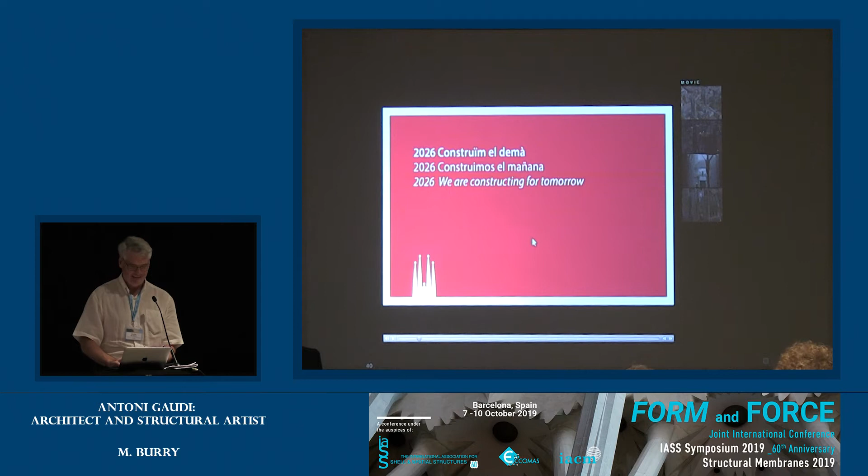This is the official video of what we're up to. It's about 4 years old now, so it's already historical. But 2026, the anniversary of Gaudi's death, is when the building is due to complete.

These are the sacristies coming up, and one here is now completed. The Tower of Mary, the second highest tower on the building, is going to be finished later this year or early next year, I believe.

This space is the Sala Creuer - I'm going to talk about that in detail, this one here, which not a lot of people know about. The Evangelist Towers are well under construction. The Passion Facade was finished last year, I think.

The baptistries are somewhere out there, as is the Glory Facade. My final role in the project was to look at all the evidence from Gaudi about what is intended for that facade, the Evangelist Towers, and then the main tower to Jesus Christ, 172.5 metres tall, which will make this the highest religious building in the world.

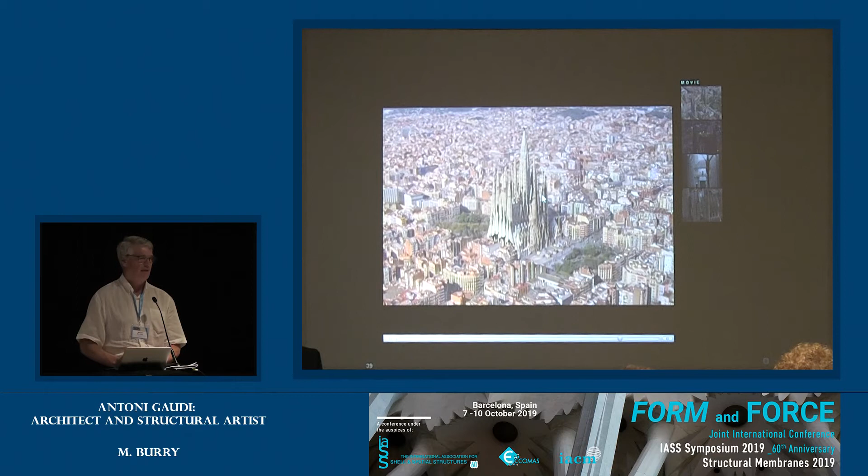So that's the challenge. When I showed this 4 years ago, which is when I think it came out, people would say 2026, come on, you're dreaming. But I think you'll see when you go there just how much has happened. The main part of the building is now at the same height, more or less, as the existing part - something many of us didn't think we'd see in our lifetime.

The position of the building, of course, it was founded by a committee of concerned citizens who felt that the growing Barcelona outside the Gothic quarter was being socially challenged through the sudden creation of wealth and the working classes that come with it, and felt that a church dedicated to the Holy Family, the Sagrada Familia, would be in order. It was originally being built in fields, but as you can see now, it's very well integrated inside the fabric of the city.

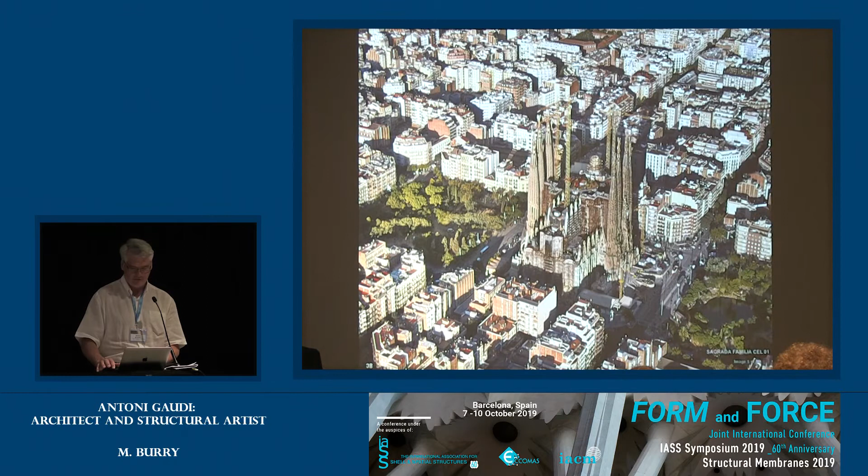In Gaudi's time, he managed to finish just one tower. The four towers were completed, but he only saw the one tower when he was tragically struck by a tram. He had also built most of the apse, but that's only less than 10% of the building. And of course, a very interesting problem.

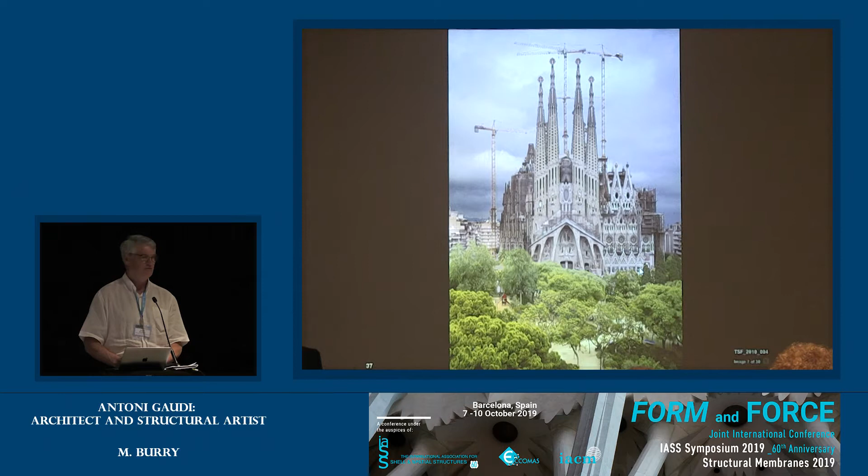When I first found the building, I came because I, as a student at the University of Cambridge in the UK, had been advised that Gaudi had no school. We looked at him in one or two slides. He was described as possibly a genius, probably mad, but there was no school, meaning that he had nothing to offer us. So as students in the late modern movement education that we were receiving in the 1970s, nothing to see, move along. But of course, coming from the Antipodes, that's a red light, which means a green light.

So I was in Barcelona as quickly as possible, and was a bit fazed because I came out of the metro and found myself looking at this facade, which is not what I was expecting. I understood that there were four towers and a part of an apse, and it was a sort of testament of a failed genius. And there I was looking at a crane and a building that was manifestly under construction.

And this led to an interview with the two directors, both of whom were 90 years old at the time, who were looking to start the major thinking for the body of the building, the nave. And the questions I had for them were, where was their authority coming from? Because I'd heard about the drawings being burnt. And the second question was, even if you had authority, how on earth do you communicate to the builders what the process is? And they said, well, that's a good time to be asking these questions because we're looking for someone to help us on this.

It was a kind of one of those very unexpected offers. I have to be honest and say that I didn't take it up. I was going back to be a great modernist architect myself and went back to finish my studies. But naturally, you can imagine, I reflected on that decision and wrote back, and was fortunately given a chance to go. I went there, and that started the journey of unravelling the secrets of Gaudi's method that has allowed us to continue on.

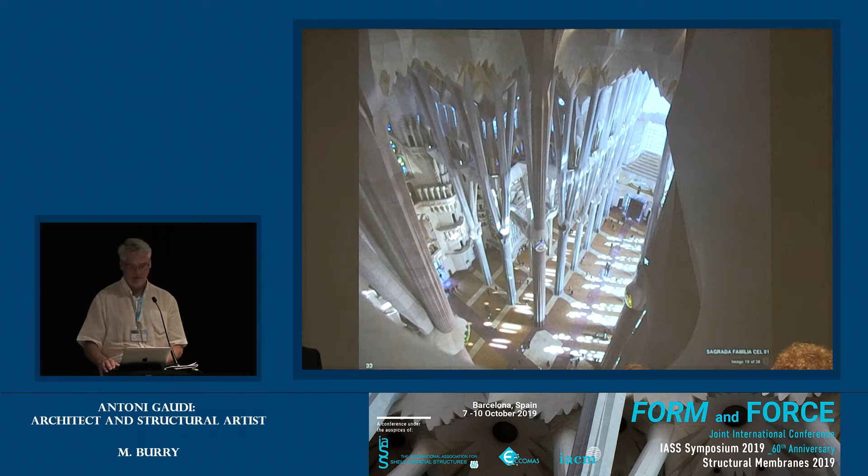You're also going to be surprised because these photographs here show it as being a very white light. It was originally glazed temporarily in clear glass, and then slowly the stained glass has been added to it.

So this is not what you'll see if you haven't been there before. Also, you'll see it with considerably bigger crowds. These aren't trick photographs—it was literally not as visited then, especially on the opening.

This is the inauguration with the Pope on November the 7th, 2010. So that effectively was the completion of the building in many ways. That's when you could go through the door and see the interior. And the rest is the main facade and the towers, which don't really affect the experience of the interior.

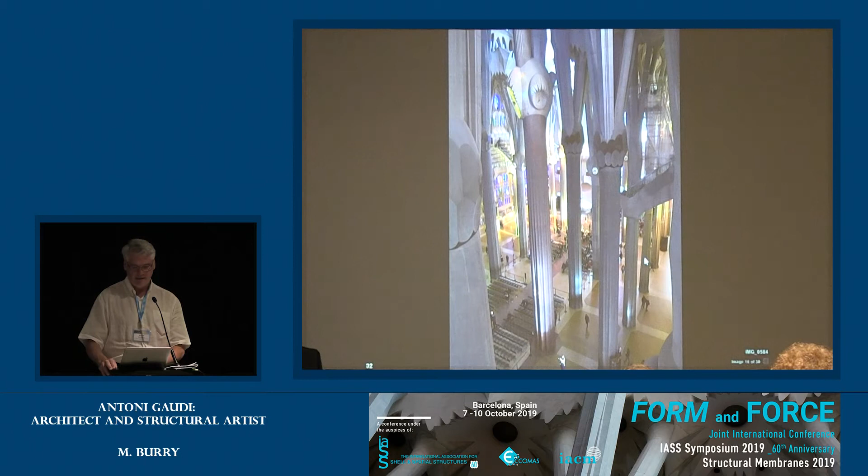There we have the former Pope, Benedict XVI, doing his thing. And now you can start seeing what the coloured light does for the building—it's very, very different. Gaudi never wrote a word on his theory, but he spoke a lot.

Hence, the young architects who were then my senior colleagues had made notes, and the notes are very consistent. They're collected in a book called Gaudi's Thoughts. He talked specifically about having coloured light around the bottom of the building and clear light around the top. So you get this extraordinary effect of heavenly clear light at the top of the building and this awesome light below.

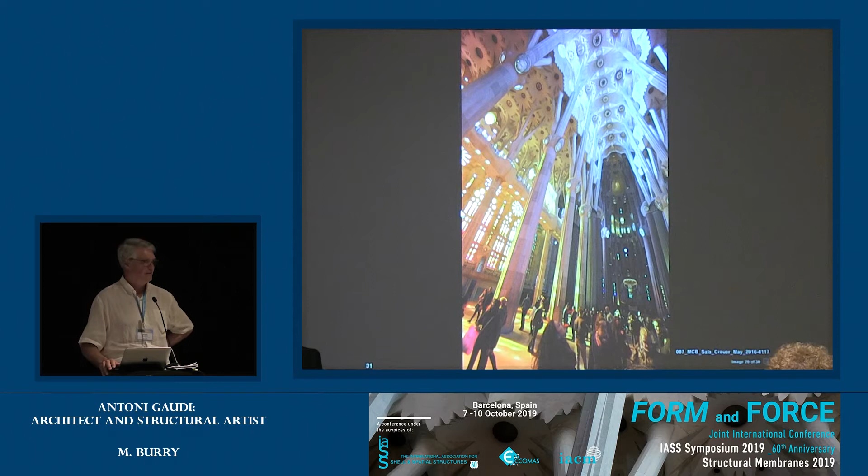And the other thing that's very clever about this stained glass is that the building is different at different times of the day, different weather and different seasons. So you cannot go to the Sagrada Familia and tick it off your list—you'll just have to come back another time in another season.

And there you can see this effect of the white light above and the coloured glass—blues and greens on the east side, cool and natural, and then the fiery reds on the setting sun side.

Now, there's some funny things about the building. If there's one thing that's unique about me, it's the fact that I think I'm the only person who's worked on the building both digitally and pre-digitally. I did all the hard yards by hand, by calculator, and by slide rule, would you believe?

And the building represents all sorts of milestones. When I lectured about it in the 1990s and showed everybody what we were doing with very advanced software, I would get, 'That's all very interesting, but what's this got to do with me?' And I was saying, well, that's what I'm trying to show you.

I was explaining what I thought would be the world of architecture in 5 years' time. In fact, it's taken between 15 and 20 years for the rest of the world to catch up with the techniques that we've been using on this project.

Starting with robot stone cutting, that's 1989. Parametric design, where we're using aeronautical software, in 1992. Then 3D printing—I think this will be the first project to have had models made of it using 3D printing, because the machine that first brought them out was very pleased to have this building as a chance to strut its stuff.

LiDAR scanning—we did get a LiDAR scanner, we got one of the first ones that came out, but that was in 2007, I think. So it's taken a long time before we could actually scan the building in order to embrace the computer power and the 3D printing to have a model.

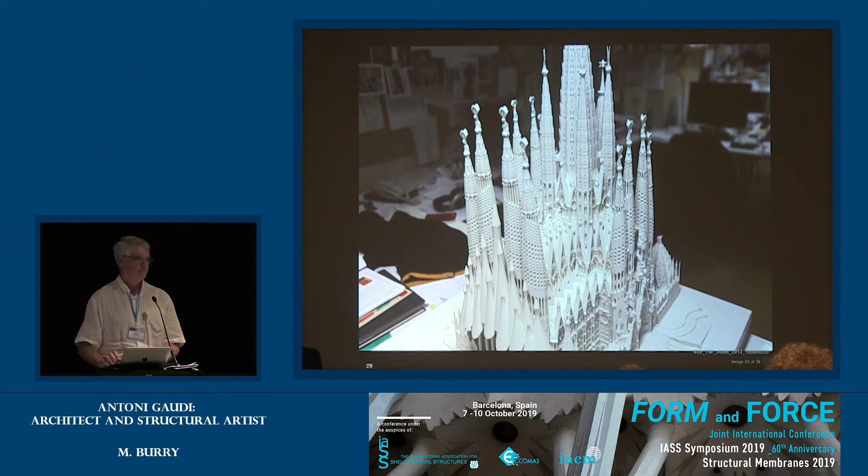Because of the engineering focus, I thought I'd better put some structures in, even though I have no pretensions in this area. I'd titled this talk Gaudi, Structural Artist, referencing David Billington, and engineers like Candela, Isler, Maillart, Nervi, and Dieste. These are great engineers with architectural sensibility who met the target of efficiency, economy, and elegance in a scientific, social, and symbolic context. I want to show Gaudi as an architect with engineering sensibility - really as an engineer, since as far as I know he did all his own calculations.

This is the Gothic Revival project that he first put to the client. It took him about 20 years before the client ever saw a drawing of what the building might look like, so there was a lot of trust involved. Eventually, this series of models was produced by David Putsch, one of the lead architects at Sagrada Familia today, whose PhD looked at the evolution of Gaudi's work.

This is the first neo-Gothic solution - not a lot of surprises there. This is actually the second, but not the final version. You can see he's assimilated something in terms of his structure. It's called the parabolic version because it's literally taking the parabola, an approximation of the catenary, as the structural system.

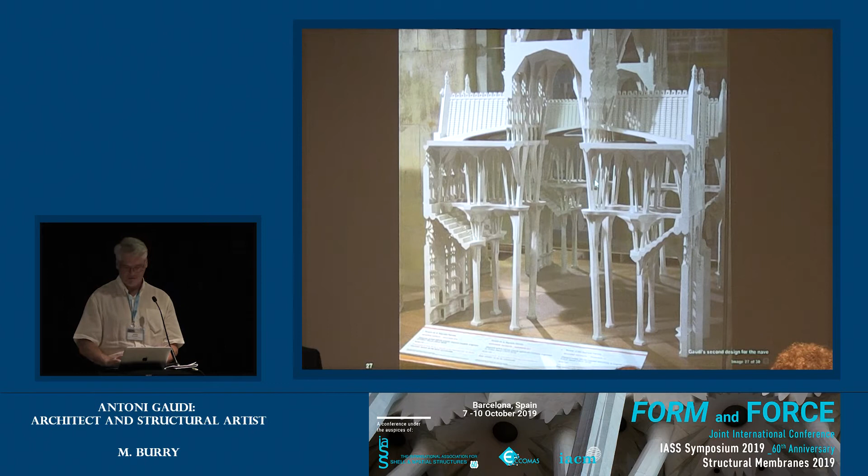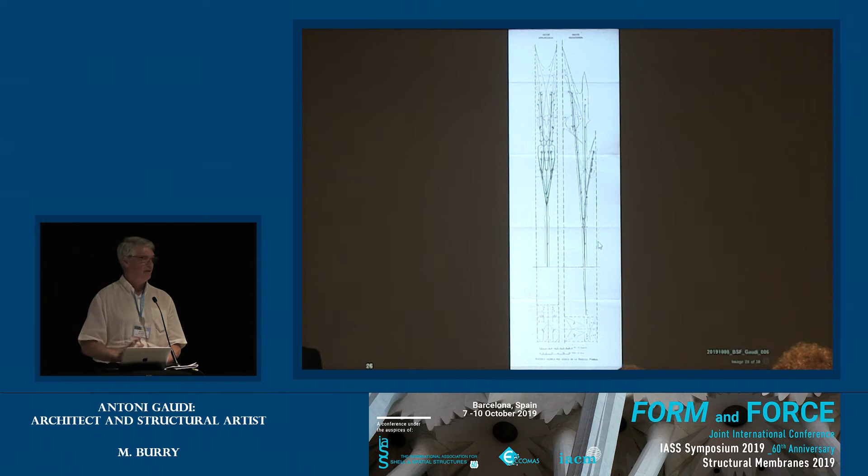This is a book published by Puig Boada, one of the two architects who first employed me, in 1929, on the Sagrada Familia, including the static resolution for the building. As far as I'm aware, when finite element analysis was employed decades later, it led to no change whatsoever in what Gaudi had designed. You can see it's all fair dinkum, as we say in Australia.

It doesn't mean a lot to me, but it meant a lot to Gaudi, and everybody's built on the basis of this. So, the first myth: the building was not designed with a hanging model in any way. He drew from what he'd been doing at the Colonia Guell Church, which I'll talk about briefly, and made a static version of the calculation.

I'm going to talk a little about things that didn't go completely according to plan - a bit of a silly euphemism, because I don't think Gaudi worked to plan at all. He's a volumetric kind of person. This is the drawing he had for the Casa Mila, La Pedrera apartments, and this is what was actually built - you'll see there's a big difference.

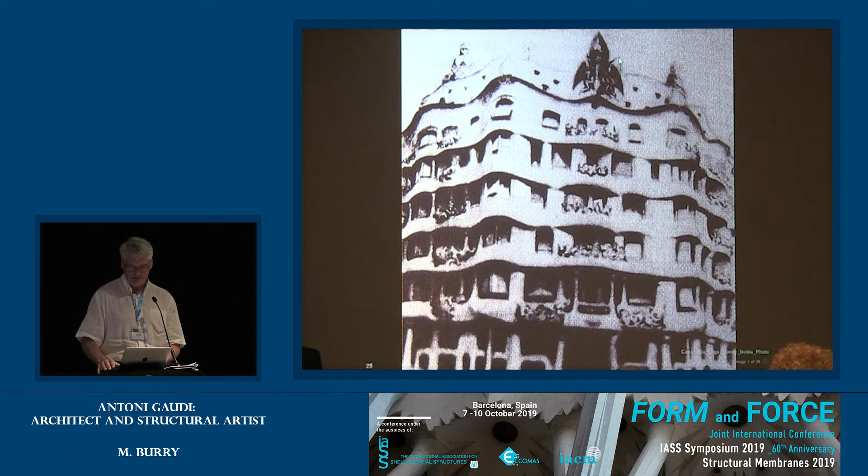This great sculpture of the angels by Carlos Mani was never built, because the client, due to social unrest and a religious reaction against the church, decided he wanted none of Gaudi's faith worn out on the building. So the building was quite disappointing from everybody's point of view - Gaudi, because it was stripped of all its religious voice.

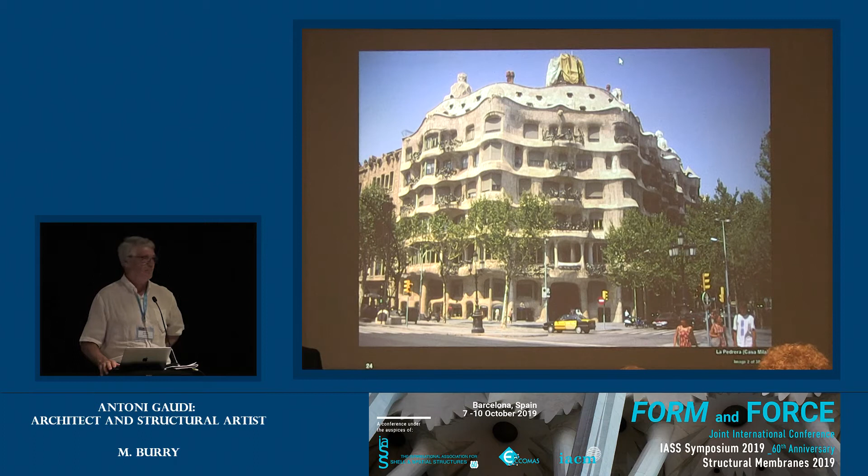The client, because it cost many times over budget and took many times longer to build than expected. He was using his wife's money to speculate on a prime piece of real estate, wanting apartments that would shift and make a good profit. The famous exchange is a great example for teaching client relationships at a school of architecture - what not to do. When the client's wife, whose money was being invested, asked after seeing the plans for the first time where she was going to put a grand piano, he suggested she took up the violin.

Why? Because this was actually what was proposed - here's one of the floor plans, and these are the upper plans, all flats. But if you look at what was actually built, you can see Gaudi himself had to enter what Greg Lynn called contractor space - that's when all the dreams of the architect and engineer are reduced to straight lines, because that's what contractors understand best.

This is where you can see that if you were putting a grand piano in here - and this joke, of course, is for architects; anybody younger than a generation behind me will have no idea what I'm talking about - but people trained in my generation worked with stencils. The stencils would have a dining table and chairs and a kitchen bench, and for some reason nobody ever knew, a grand piano was always on the stencil.

Anyway, we can play the grand piano here. So these are Gaudi's drawings. We don't really fully appreciate that it's actually a steel building - shipbuilders were the engineers and makers of the frame.

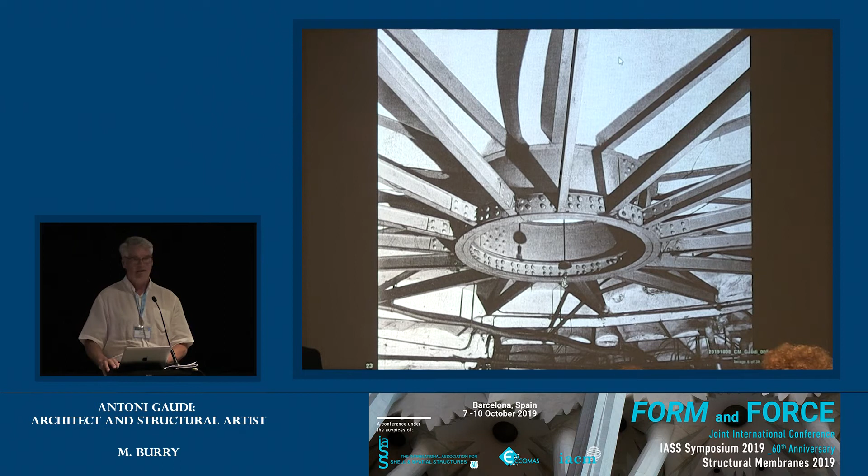So a very early example of a steel building. What we're looking at is a stone veneer. And because it's so perfect, we don't actually look at it critically enough and imagine how on earth did these blocks of such weight get built, 5-6 stories above the street level and fit so perfectly. And what about the kind of radical idea of a crease that becomes smoothed out?

It's a long time now, but every time I had a chance to get students to model this by hand, they could do it with sandpaper on a piece of square section timber and they could just roll it. Then I'd ask them to model it on a computer, and it's probably a bit easier now, but certainly it was impossible to get that fluency that you can in the real world.

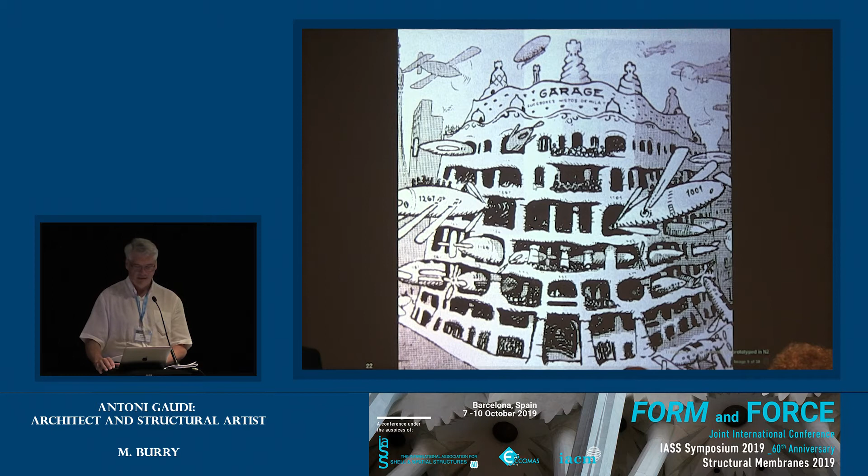And the building, when it was finished, had fallen out of fashion. So not only did it cost so much, take so long to build, but it was now a joke. Here it's being wit - being proposed as an airship station. And worse than that was Gaudi himself fell out with the client.

He fell out with the client, and you can see them having a battle, because, in fact, it led to a court case where Gaudi was actually claiming his fee.

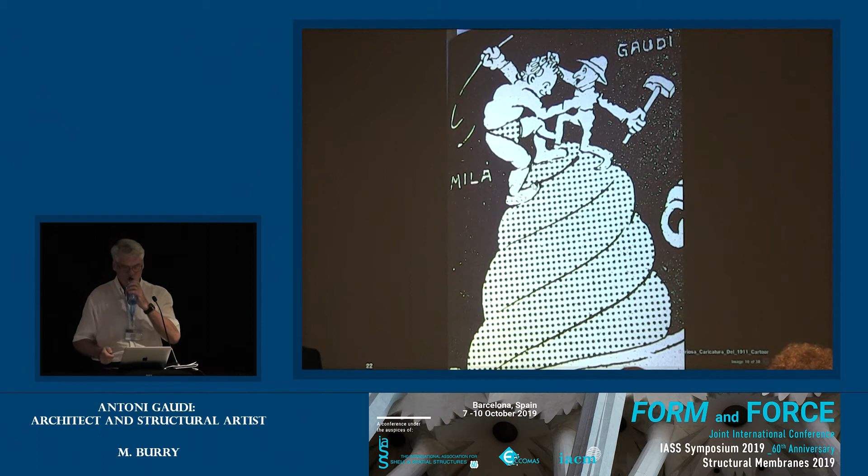A little bit of theory for today.

Towards a Plastic Architecture. The new architecture is open. The whole structure consists of a space that is divided in accordance with the various functional demands. This division is carried out by means of dividing surfaces in the interior or protective surfaces externally. The former, which separate the various functional spaces, may be movable - that is to say, the dividing surfaces, formerly the interior walls, may be replaced by movable intermediate surfaces or panels. The same method may be employed for doors.

In architecture's next phase of development, the ground plan must disappear completely. The two-dimensional spatial composition fixed in a ground plan will be replaced by an exact constructional calculation, a calculation by means of which the supporting capacity is restricted to the simplest but strongest supporting points. We've seen a lot of that over the last few days.

For this purpose, Euclidean mathematics will be of no further use. But with the aid of calculation that is non-Euclidean and takes into account the 4 dimensions, everything will be very easy. Well, the whole point of this conference is to drill home that it's not very easy and that we're all incredibly clever by finding our workarounds.

But isn't it incredible? This was written in 1924, 2 years before Gaudi died, by Theo van Doesburg, Towards a Plastic Architecture. He's making a manifesto case for why we need to take ourselves out of the rectilinear and out of the Euclidean, and Gaudi was doing just that.

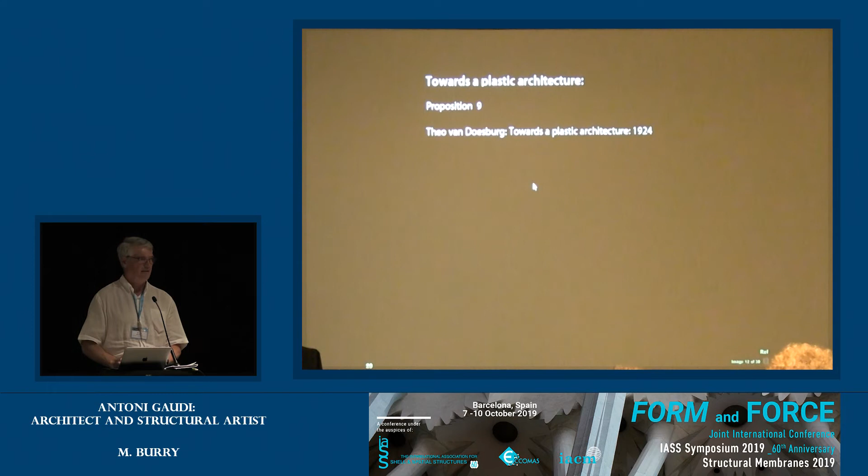We can see that very clearly in this building, which I know you know very well, but I'm going to share my thoughts about it, which is the Colonia Güell Chapel Crypt by Antoni Gaudi.

You can see that it was a long project, 1898 to 1914, starting with the famous hanging model, which I won't dwell on too much, but did you know that it had tensometers, that it was highly scientific? So back to Billington's scientific, social and symbolic - this is scientific.

Not only did he make the world's first - I'm sort of doing a bit Trumpian there, should we say, one of the world's first - architectural computers, but I'd love to know if there was any earlier.

Force finding form, the theme of this conference - obviously this building is the primary exemplar of this. But Gaudi, it took 8 years to do this, and he was building it off-site, outside Barcelona, in a shed at a scale of 1 to 10, modelling all the weights very accurately at a scale of 1 to 10,000.

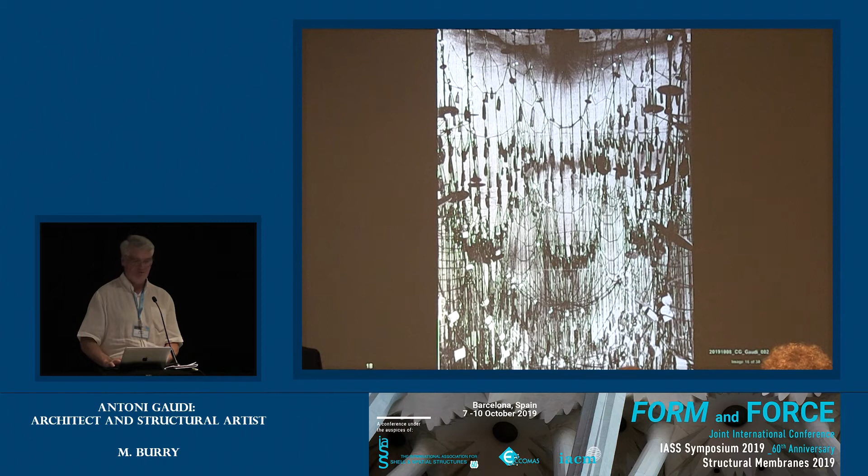Gravity was finding the force of the building, and the tensometers he placed in various strategic places were measuring the forces, which he would then mark on these little discs. The model was painstakingly rebuilt by Jos Tomlow and colleagues, ultimately in Frei Otto's Institute of Lightweight Structures.

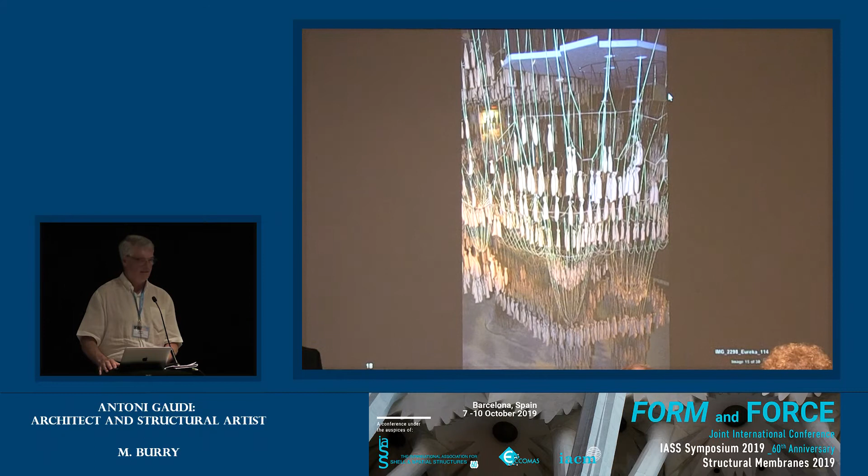By having Jos and his team rebuild it, we know exactly what was involved. It took 8 years to build the model, and then imagine this as an undrawable project—this is what Gaudí did. He actually had to take a photograph of the building, turn it upside down, paint over it, and that's what the client was presented with after 8 years. When he asked what it looked like inside, no problem—it's another photograph and painted.

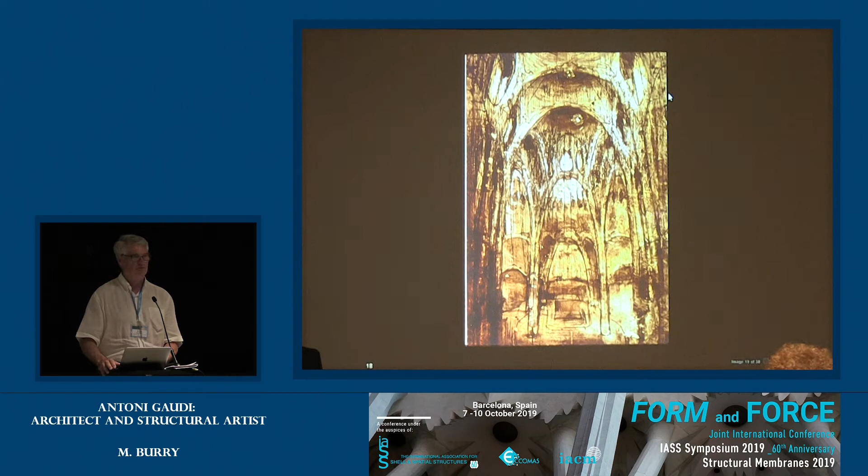These are all pre-digital techniques when you think about it. It's Photoshop, it's Maya, and then you come to the parametric modeling. The model itself was parametric, obviously, and it was used as the drawing for the project. All the measurements were taken, scaled up, and put on site, and then you get this extraordinary interior. Those of you who've been here long enough to go out here and haven't, it's an extraordinary project.

I think it's Gaudí's best project, but not his most important. It's his best project because, working as an artist and a sculptor, he took it as far as he could—but he didn't take it far enough, as you'll see from the outside. It was only constructed to the basement. The whole church above was never constructed, and no doubt never will be.

He had a great client who allowed him 8 years to do this. There's no steel, no tricks, no concrete—it's all Catalan vaulting, which you've heard about from several sources, and just very skillful brickwork.

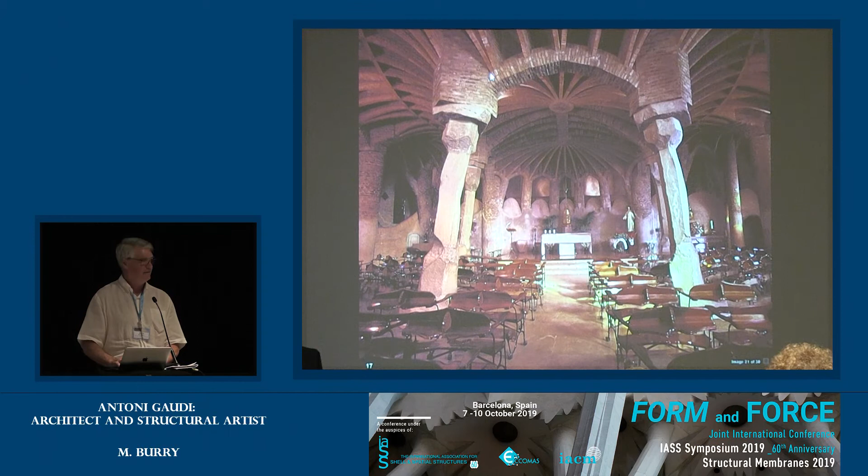Someone with a lot of confidence—he decided that these basalt columns, which were naturally formed hexagonal prisms from the ground, were a bit overstructured. So he asked the stonemasons to chip away each one. You can see there's a layer of lead here; he's even thought about that. There's 2 centimeters of lead so the building can adjust as it gets higher.

In order to gain the confidence of the stonemasons to make this scarf cut, he had to stand underneath it while he was doing it. So I think that's someone who knew his stuff.

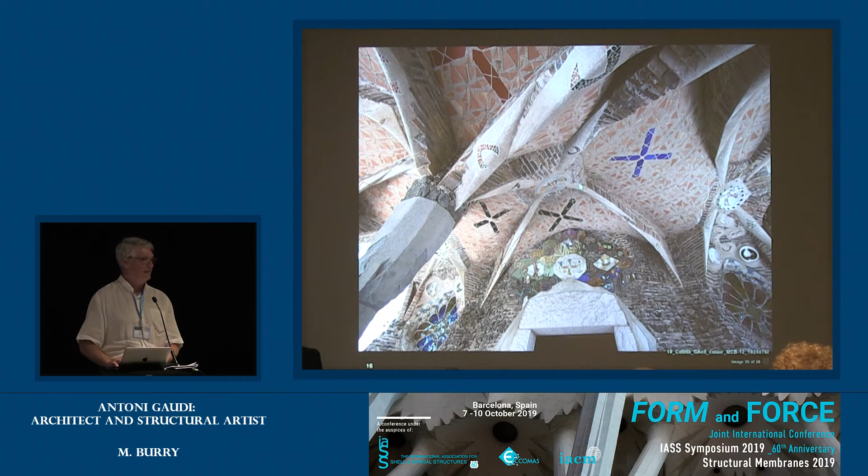In this project, he introduced the hyperbolic paraboloid for the first time, a ruled surface, and you can see that appearing. It seems decorative here, and here it's a decoratively applied surface, but it has great meaning for the rest of us who followed in his footsteps.

In terms of sustainability, you can't get more sustainable than this. This is brick, not of the first quality, actually placed along the lines of force. Anywhere there's infill, he's using the brick—broken brick that comes from a misfiring. When they make bricks, there's always some that aren't up to scratch. Well, that's what he did with them.

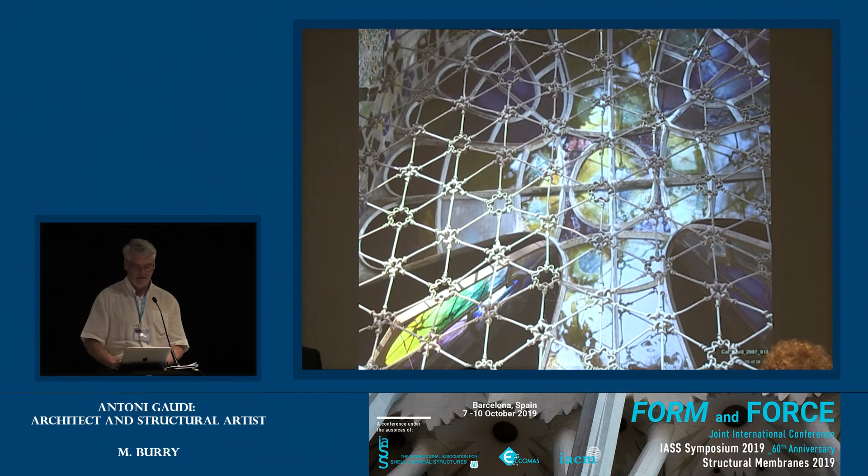Then there are these windows, which are to die for, because they're like butterfly wings that open. The grills are made from the discarded needles from the factory that this little chapel was built to support—it was a corduroy factory. So Gaudí, at the beginning of the 20th century, was looking at sustainability in no uncertain terms.

These are testaments of failed genius. They've now been cleaned up by UNESCO and whisked away, but it was such a romantic building to visit until it was restored—though in my opinion, it was better the way it was. You had these columns just waiting sadly outside for the interior they'd never be asked to involve themselves with.

So let's have a look at other aspects of Gaudí.

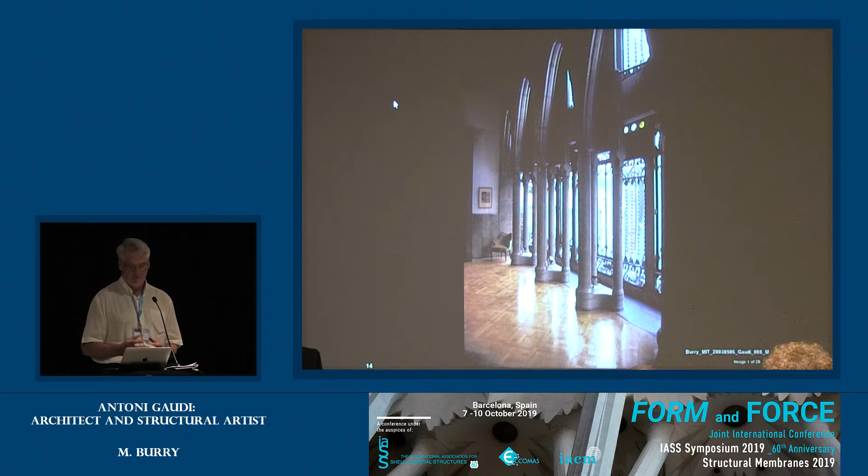I'm going to talk about columns shortly, in his generation of columns, but even in one of his early works, finished in 1889—the Palau Güell, at the bottom of the Ramblas—built for his major client, Count Güell, who was also behind Park Güell and the Colonia Güell, no expense was spared. It's a great building to visit, very easy, right in the centre of town, and you can see the most extraordinary materials—ivory, ebony—used in profusion in the most extraordinary way. I'm not going to talk about that.

And this is the plan of it—this is the floor plan. These refer to arches. This is the ground floor. The next one up has these arches, like an arcade of parabolic arches which go the whole length, which I'm sure you've seen.

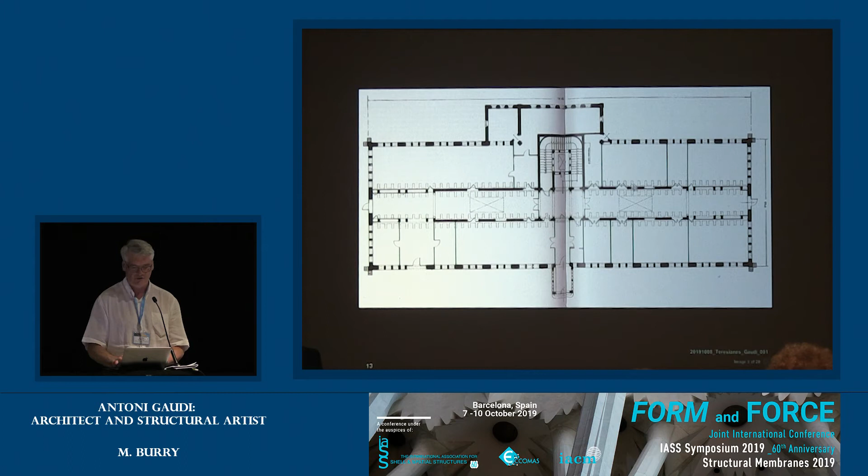That's them here, full length of the building. It's only got three materials: brick, random rubble, and plaster. That's it, the entire thing.

Yet look at these columns. They're located in this section, here on this floor, supporting two floors of masonry above them. I always ask architecture students to think about why these columns manage to do the job they do. In the hall, which spans a third of the building's width, you can put your ear to one column in one corner and ask somebody to just tap the column diametrically opposite, and you can hear it twanging away like a musical instrument.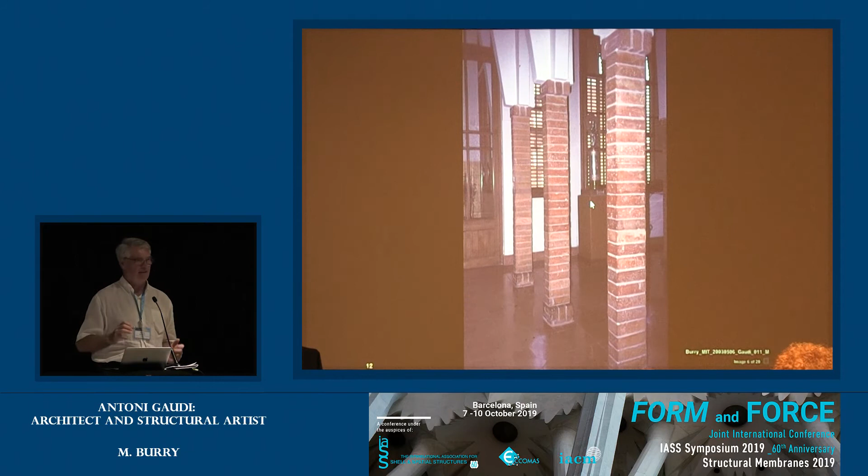They're working very hard, but when you think about why they don't collapse, it's very clever—it's that business we just heard. If you load a structure up, it can actually perform better than if it isn't. They're not going to shear easily because it's got two floors of masonry, and they're not going to buckle easily because you'd have to tip two floors of masonry up. So that's why they're still there.

These columns are actually conduits in Park Güell, taking water down from the terrace above. They look arbitrary, but they're not—they're absolutely calculated to act as retaining walls.

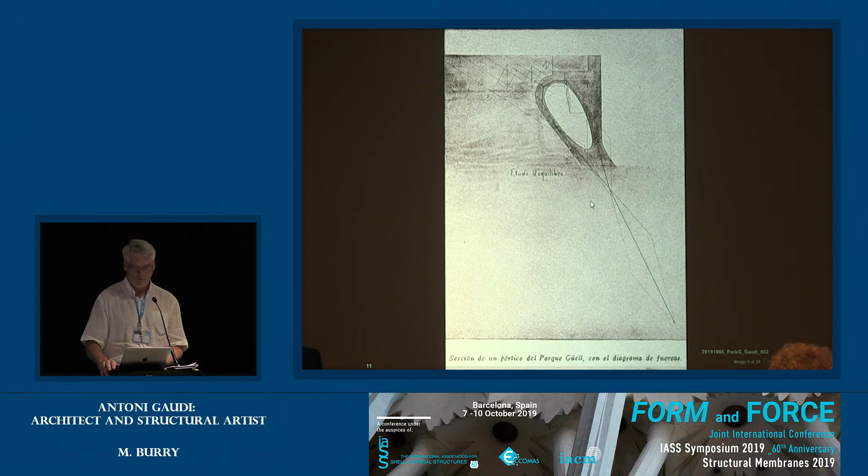Playfulness and creativity are the two ingredients that a structural artist, and therefore the architectural artist, has to bring. And here's Gaudí—that's as playful as it gets, referring to the Erechtheum in the Parthenon. And of course, you've seen this.

What did he do to make sure the building could be continued in his absence? He must have realised, aged 62, after the Casa Milà sort of catastrophe—when I ask people what Park Güell is, most don't seem to realise it's actually a failed gated community. It was meant to have 60 houses, but all the investment went into the infrastructure. So it's a great park, but not a very good housing estate—it's only got two houses in it.

With the Sagrada Família not looking very flush in terms of progress, he was ill, convalescing in the Pyrenees, and must have been wondering what the plan would be after his demise. So he thought about bringing a geometry to bear, using doubly ruled surfaces. There are only three: planes, hyperboloids of revolution, and hyperbolic paraboloids. Why? Because these surfaces are very easy to describe—they're, as you can see, straight lines in space.

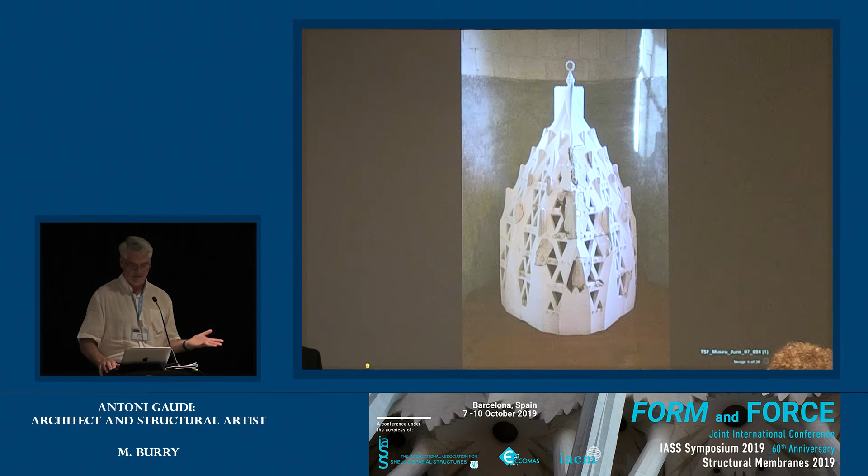So with just a few pieces, and the fact that there's a system—I'm not going to explain the system, I'm just going to show you that there is one, and there's plenty of writing about it now—these small fragments allowed us to take an archaeological standpoint and distill the surfaces from that. These are a range of two hyperbolic paraboloids, a green one and a red one. They intersect, and there you have the generation of the roof of the sacristy. But not only that—this is a parametrically variable entity.

All the towers, remaining towers for the building, other than the ones in the perimeter, are based on this construct.

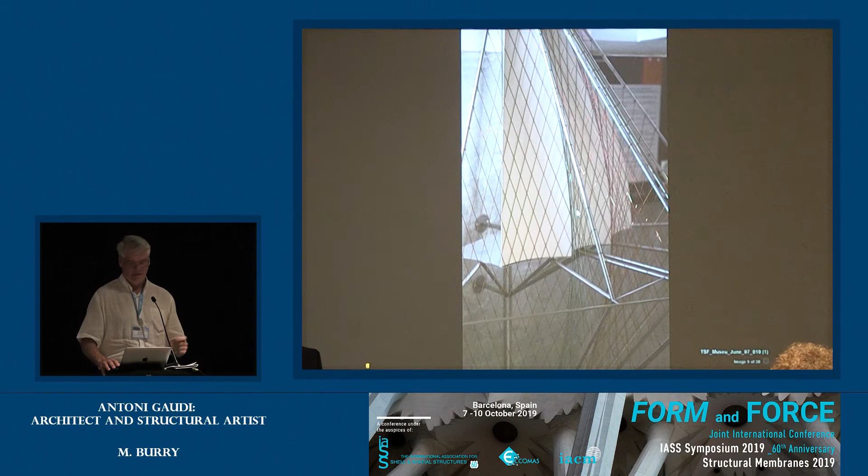Not sure why he did this, but he did literally a tracing in plaster that survived the fire. It's so fine, it's about this wide. We've measured it accurately. These are the sections through the parabolas. It's not that it looks like a whole bunch of intersecting hyperbolic paraboloids.

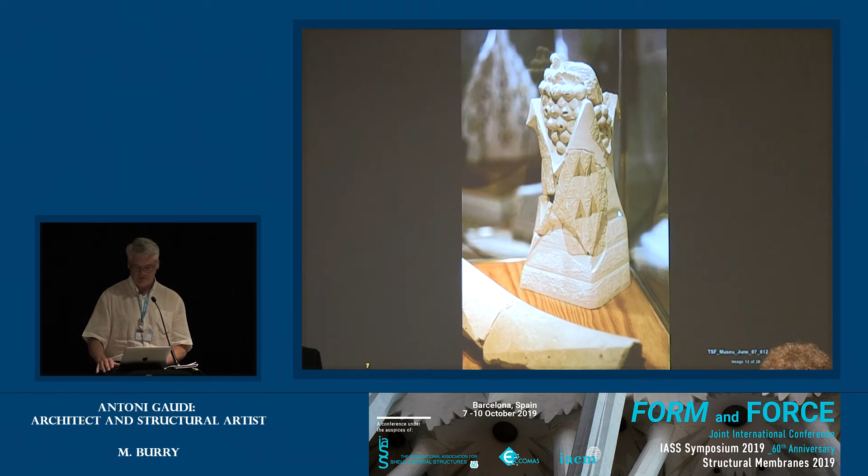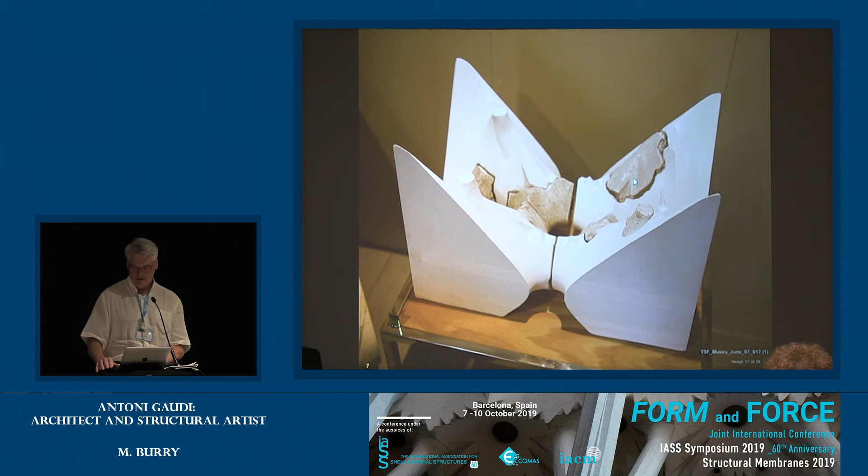It is a selection of hyperbolic paraboloids. Everything right down to the decoration is based on these doubly ruled surfaces. Here you can see the primary intersections for the ceiling vaults of hyperboloids of revolution of one sheet. And there's the proof. It's not that it looks like a hyperboloid revolution, it is a hyperboloid revolution, which means with just a few fragments we've been able to extract the geometry from the project and then use appropriate technology to build it.

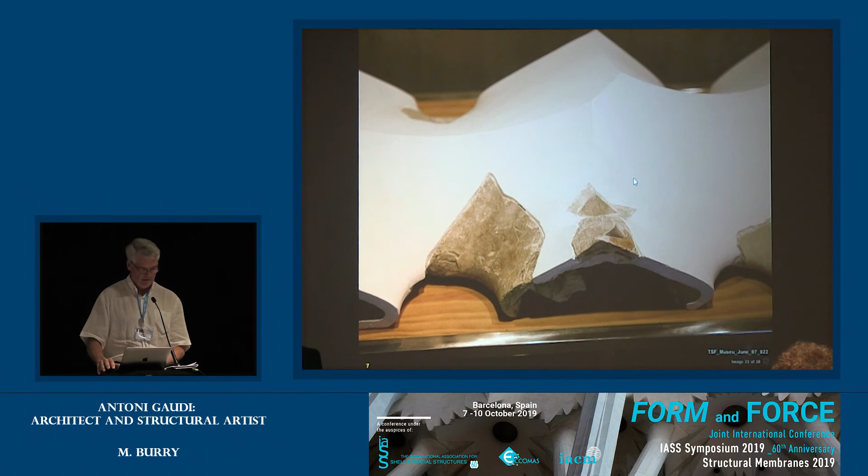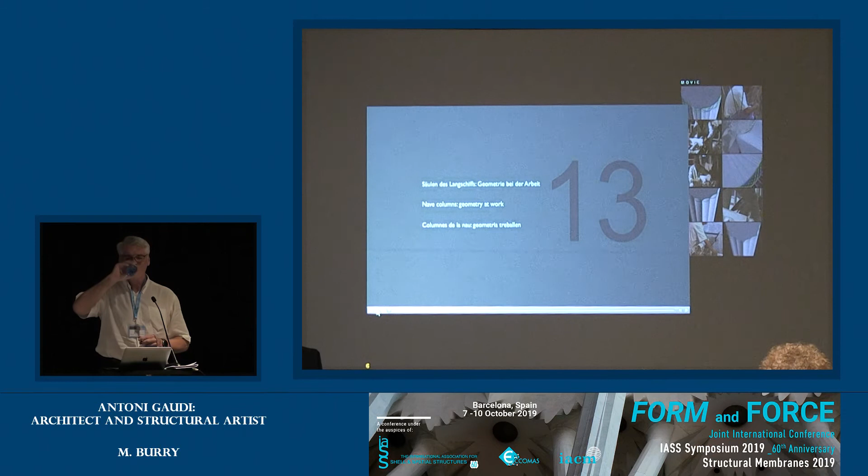The story of the column generation can be shown in this video here. So, what's the story about these columns? What is it about a systematic algorithmic approach to architecture that Gaudi spent his last 12 years on that allows these columns to be built years after he died?

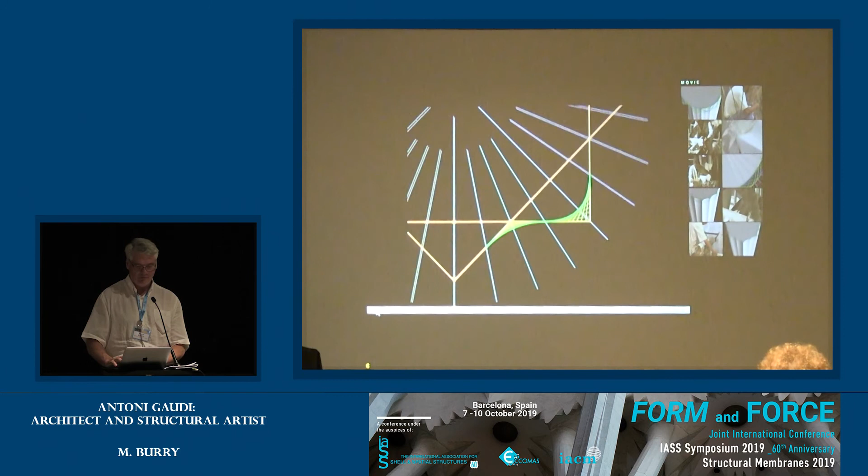They're based on a section through a hyperbolic paraboloid, which is a parabola. So we've got convex and concave parabolas forming a profile around the perimeter. So all of the columns at ground level have this as their basis. Cotangent, convex, concave parabolas, which in extrusion would give you a barley sugar or singly rotated.

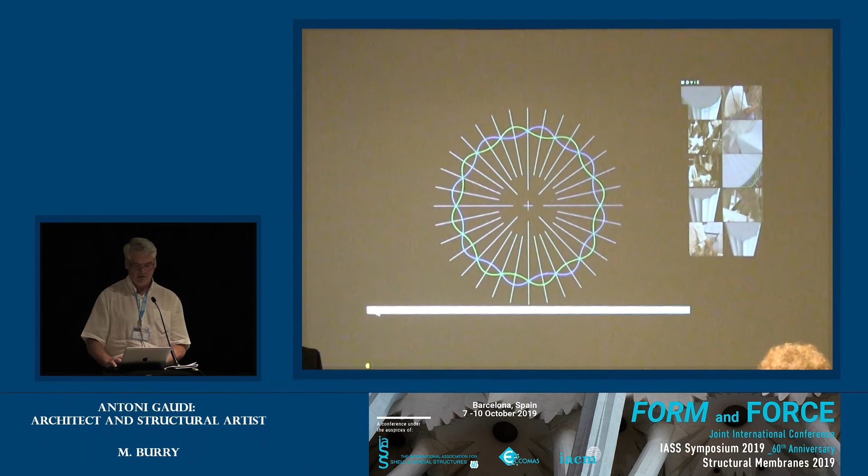But in fact, the column profile is two profiles sitting on top of each other. And these two profiles are wandering from each other as the column gets higher. So you're seeing it in 2D to make it really difficult to understand what I'm talking about. But that's so that when you see it in 3D, it all becomes clear and you realize it's not 3D at all, it's 4D. Gaudi is thinking in a non-Euclidean 4D way.

So that's what the column looks like, and we'll now see it going up. You can see as it rises, those two profiles are counter-rotating, and you can see the column emerging. When it gets to a certain height, if it carried on going, it would just go back on itself. So brilliantly, following nature's guide, he doubles them. At this point here, you can see the two profiles are exactly out of phase. It cannot continue. So what he does, he doubles the profiles, and that gives you the next series going up.

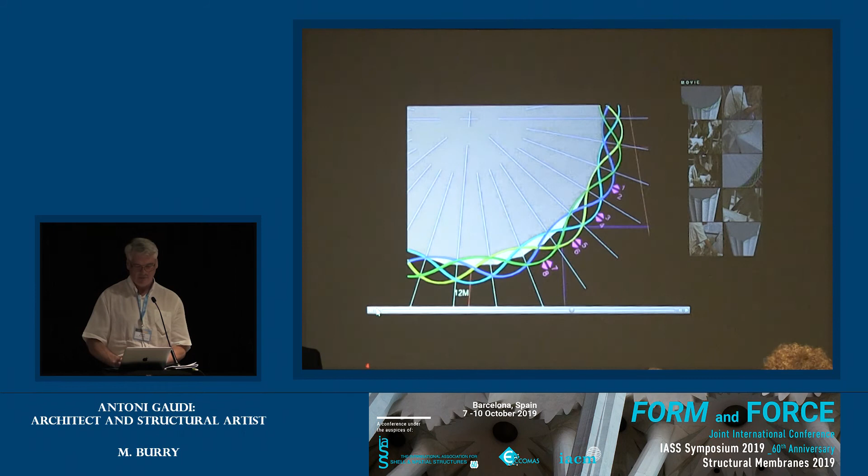And again, so when you look at the column and its final generation, all the columns you're looking at have this double counter-rotation behind them. Here you can see the arrises appearing, and when it gets exactly half out of phase, it doubles the profiles and you get a new set of arrises coming.

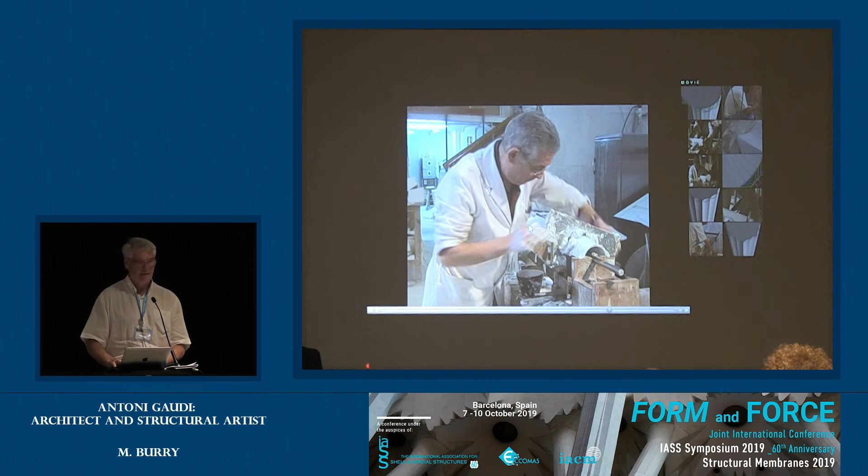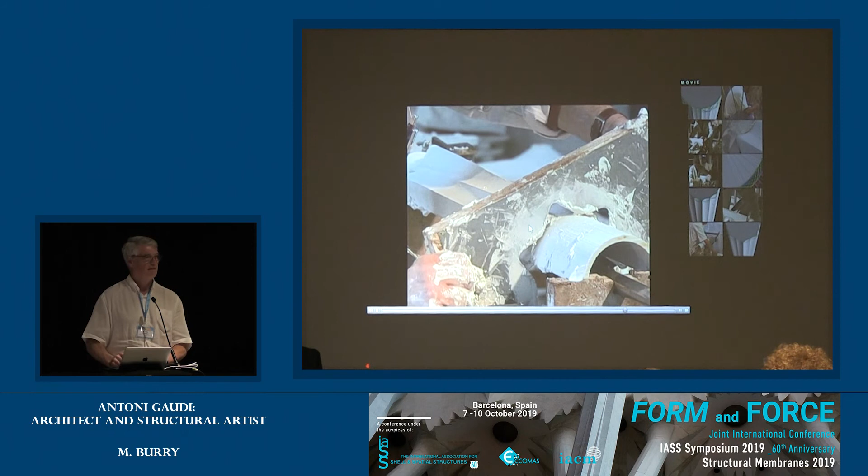And then here's the beauty of it. You don't need a robot to make it. So that's the technique for making the columns, if you were describing them. Obviously, you have to do it in sections, so when you have the doubling, you get it. But it's a superbly simple technique.

And so when I'm talking to my students about what is an idea and what is a concept, and does it have to be complicated? I show them that complexity, real engaging complexity, can come from the most simple gestures, and we all know that. Gaudi was king of it.

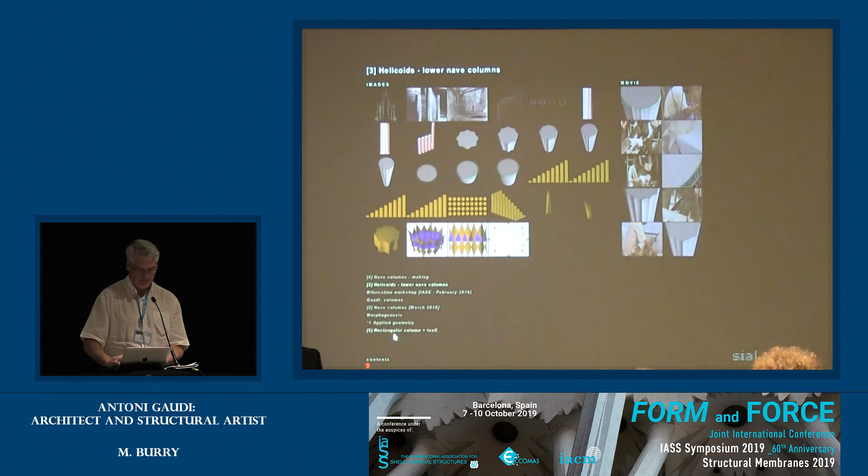So I've got 8 minutes left. I'm going to do some very dry stuff and then just finish with a bang by showing you how the building's being built today. The dry stuff is important, I think, which is why I'm showing it.

It's this difficult nexus between research institutions, universities and practice. And I thought this was a peculiar Australian condition, but I think it's actually fairly typical, which is how do you get a recipe for universities, practice and research to work together with synergy?

Well, it's indulgent clients and no real hurry. Gaudi had those, but we typically don't. Governments who believe in tax-funded research for public good, well, that varies across the world, but it's not too evident in where I live. Practices willing to share their knowledge, now that's a good one, isn't it? A lot of changes required there.

Universities able to work with real-world constraints and postgraduate students willing to extend their architectural education by a number of years. Yet we need this to happen, for research to happen. And the Sagrada Familia, of course, has been just that. That's why it's been such an important building to talk about.

As much to celebrate the genius of Gaudi, but to celebrate what it means to have a project like this - a living laboratory for experimentation, because it's certainly the most advanced building in terms of off-site fabrication, which I'll show you briefly in a minute.

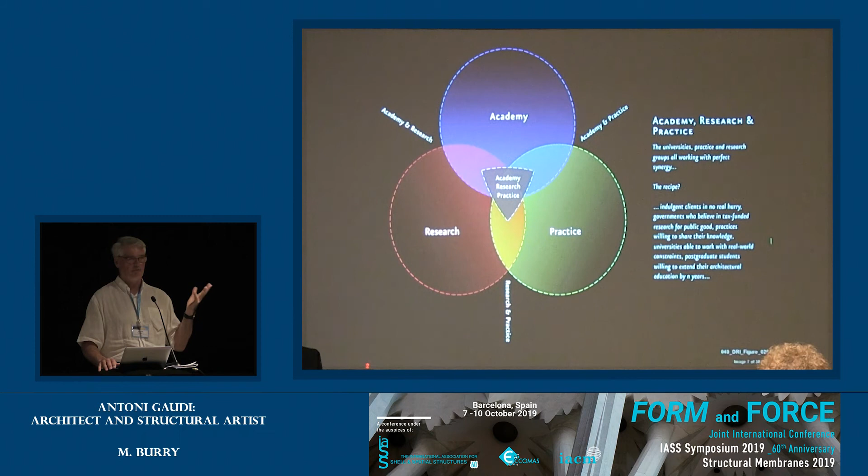Why is it the most complicated? Because it's being built with people going through the building. There may be other complicated buildings going up, but they're not being visited by 4 million people annually.

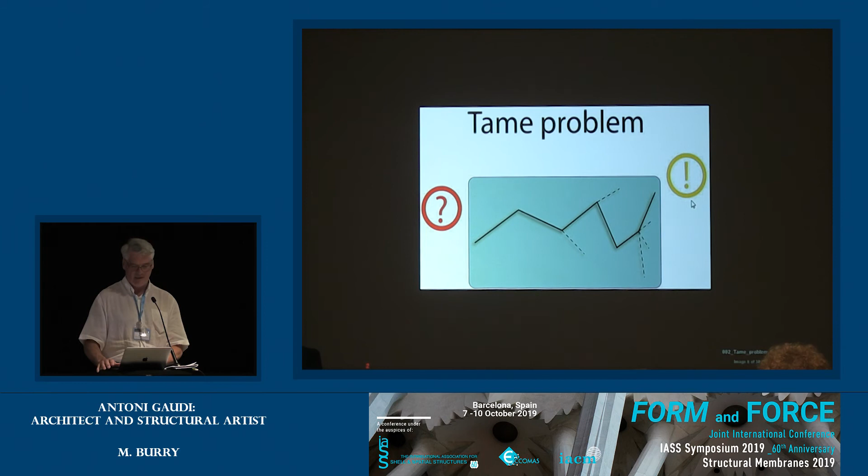So the amazing thing we've got to do is embrace the tame problem solvers. A lot of engineers are definitely equipped with this skill - they can take a problem and find the straightest path possible to the answer. Whereas architects and designers tend to embrace the wicked problem as their ideal environment, where a lot of questions will be strung up along the way. There will be something at the end, but it will be an option, not the answer. It'll be the best option if we've done a good job.

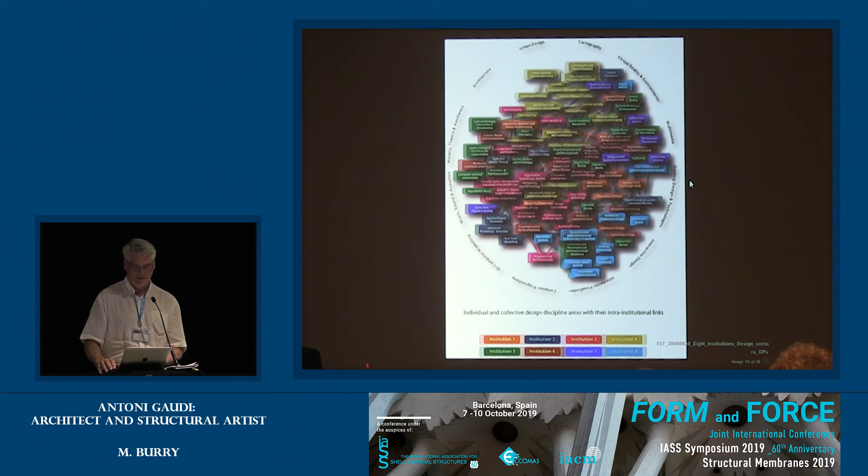But when you see how this comes together, this is 8 institutions with their various design skills being mapped so that we could do a major Australia-European funding grant. You just realise that there's just so much that's in design. And yet, in this kind of conceit that architects have, we typically split our courses up into usually 6 specialist subjects with some kind of design overlay.

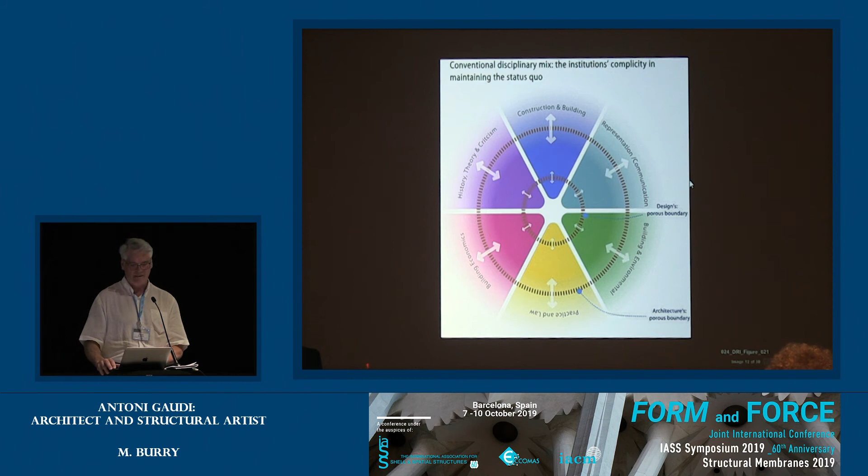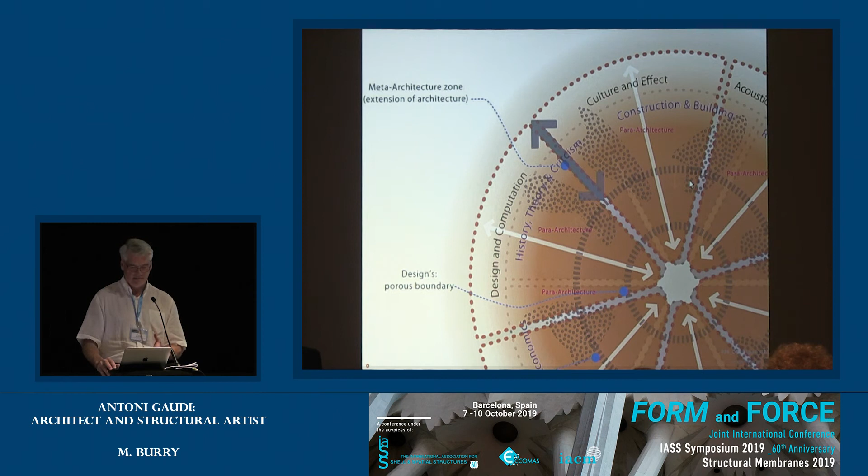Design could be at the core of it, or it could be a loose mix, or it could be represented specifically in them. Whereas for years now, we've had this opportunity to have a kind of digital overlay, which allows us to effortlessly talk the same language, whether it's historical, technological, economic, or philosophical. We have these incredible tools now to do this. But how many schools of architecture - and I'm not sure engineering is far behind - are really making the most of this? And how many universities are able to get these silos to really get across? Have we really got to the bottom of what is the proper and most appropriate disciplinary conversation?

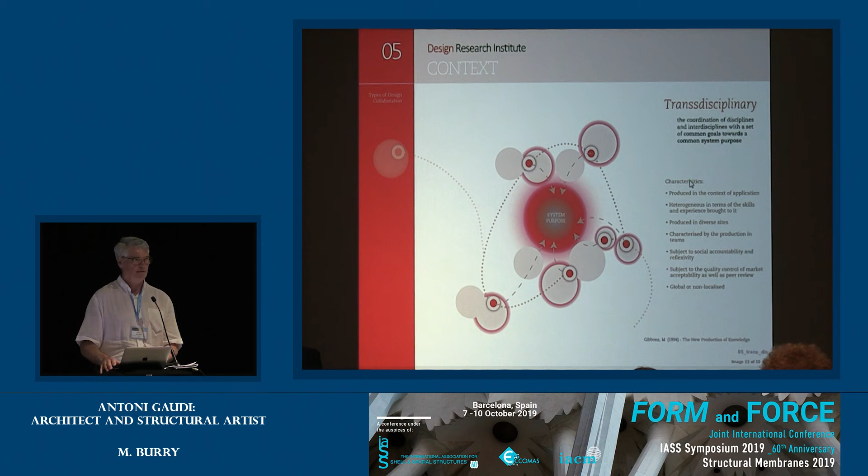We argue that the transdisciplinary is the way to go. A transdisciplinary project typically has at least 2 disciplines working on a project, not just in the library, with an external partner. At the university I'm at, Swinburne University of Technology, all our research has to have an external partner, otherwise it's just not embraced as being reasonable.

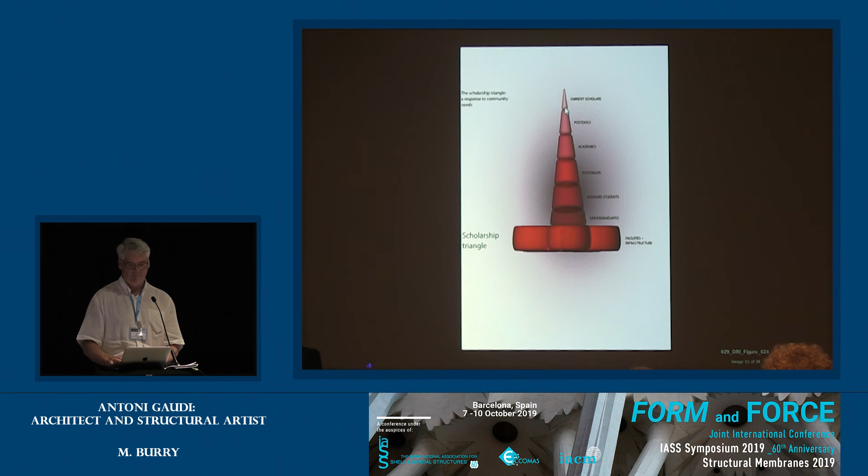We also have the need to get the Boyer Scholarship Triangle kicking in, and that's what I love about the old architects seeing Gaudi when they were just young architects, but there was an eminent scholar, Gaudi himself. Universities have these pillars, but they sit in faculties and may or may not talk to each other within the faculty, but then to get the faculties to cross each other is very, very hard.

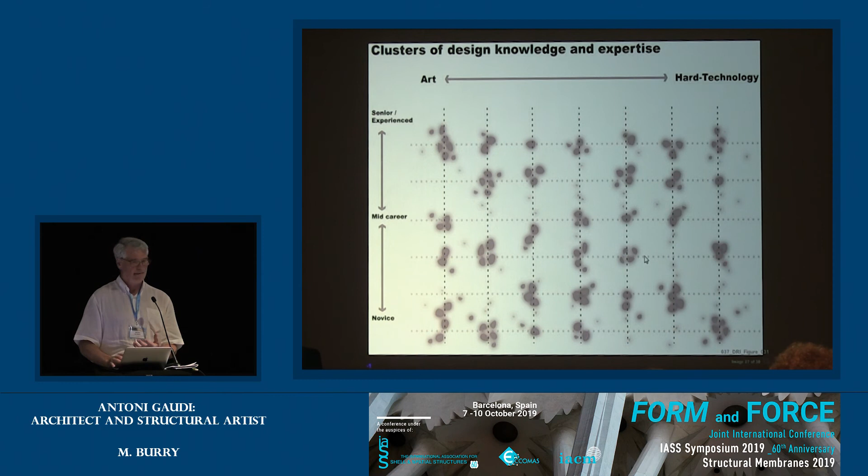What it represents, though, when you see it, is a mapping of a university ranging from art to hard technology, or senior experience to novice. There's pockets of activity and opportunities for clusters to form where we can really have a very good time. And then when you remap the university, you can see if you get all this to happen, it's a very rich environment that nowhere else can compete with. There's no possibility of a large accountancy firm or a large engineering company or multidisciplinary firm to be able to say they can do this. So that's my beef.

But this is the problem. If we're going to do transdisciplinary work - say we're going to have 30 students in a studio, 15 engineers and 15 architects - that's going to need 2 teachers. Because how many teachers do we have who are able to do both? How many Gaudis are there who can come and do that? So I think the major role for us all as educators is to produce people who can approximate Gaudi as much as possible, and that's by getting students to work together and trade off their various skills.

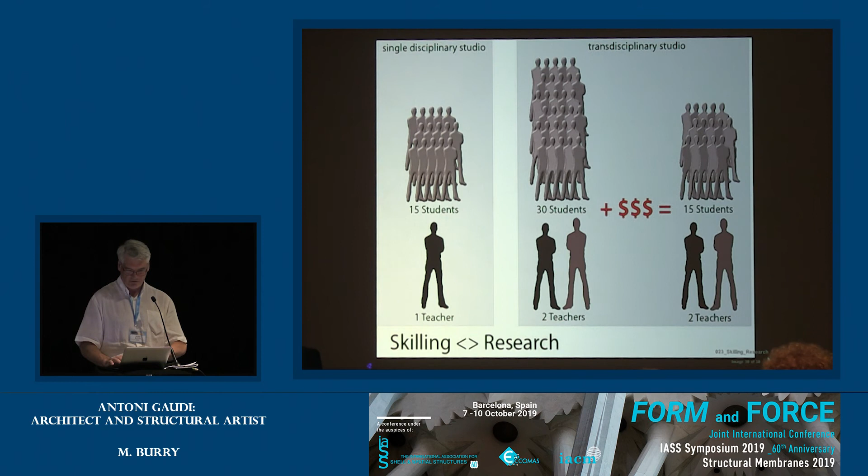So to finish off, I'll just show you the Sala Creuer. I am having difficulty finding it.

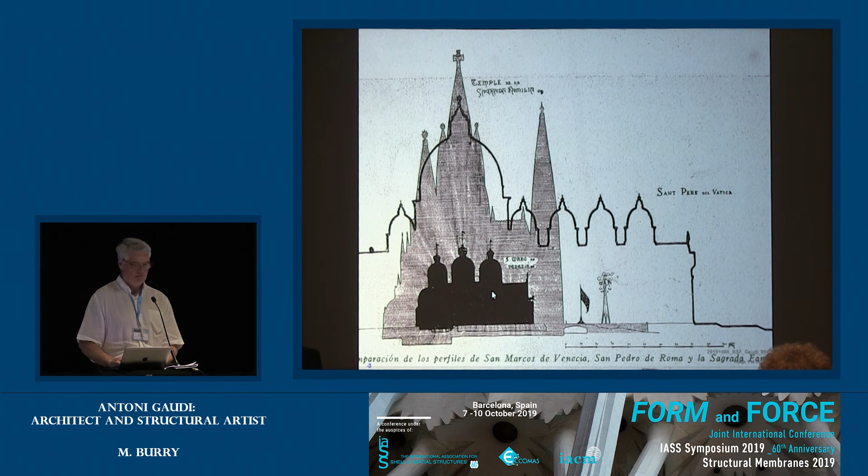What do we take from this drawing? He produced this in his lifetime. It was published, so we know he had a very clear sense of the interior. What do we make of this space here?

From my point of view, as an architect on the project, I had at least two decades of apprenticeship because I was just reverse engineering existing models. But when we came to this point, it was gloves off. We had to extrapolate the lessons of the apprenticeship to something else.

So we had a debate about whether it was hatched out because it had no relevance to Gaudi, just an attic space, or whether it was hatched out because it's going to be the last thing to be built and he didn't want to invest time on it.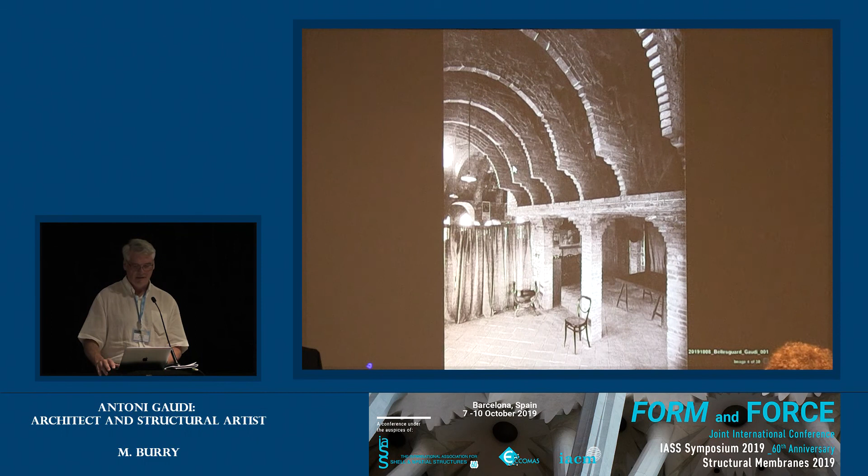Every attic space in Gaudi—this is Bellesguard, just a private house in Barcelona—look at the brickwork for this. Which architect is going to do this for the attic of a house and not think big for the attic of a basilica?

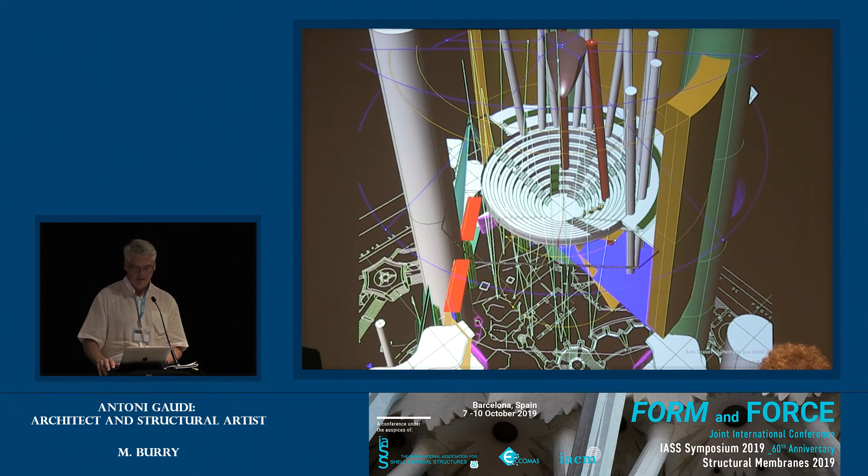So we decided to make this into an auditorium, because it's the space where everybody will collect at the end of the ascent past the nave and before going up to the tower right above it, about 72 meters above the center of the building.

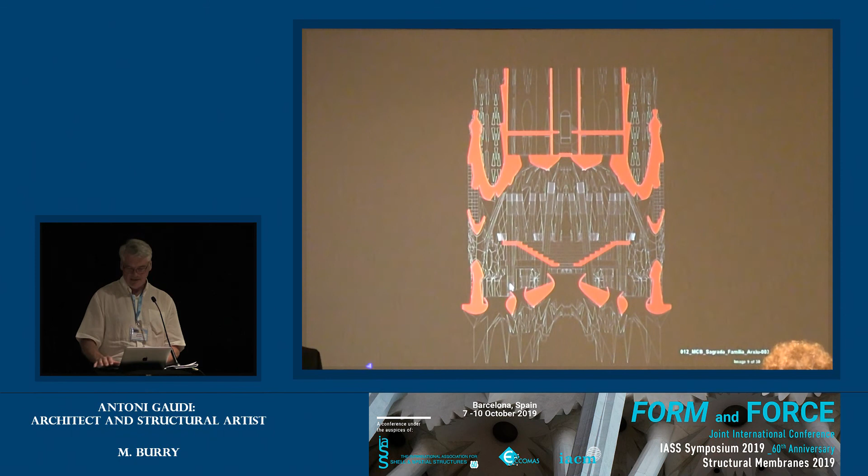And we decided to make it into a sort of floating flying saucer, so that light will be able to go into it and light will be able to go below it. And the story of its production is a great one.

We're using this parametric software, so for the first time, as far as I'm aware, on a major architectural project, we are using aeronautical software with teams, each with different components.

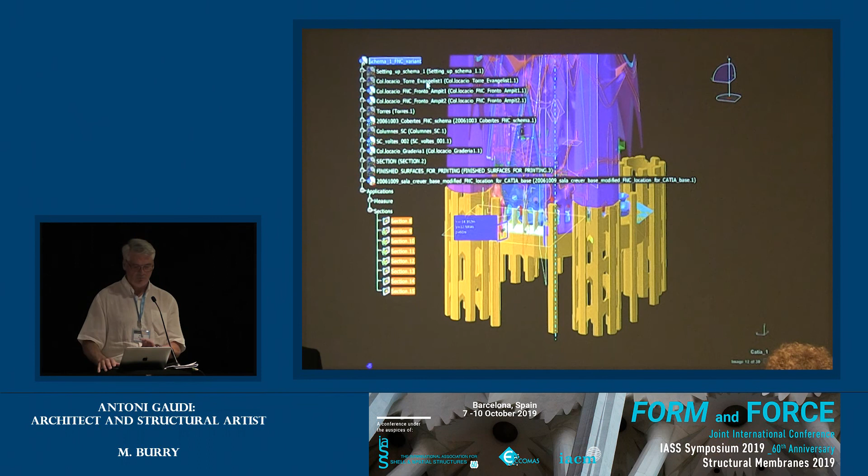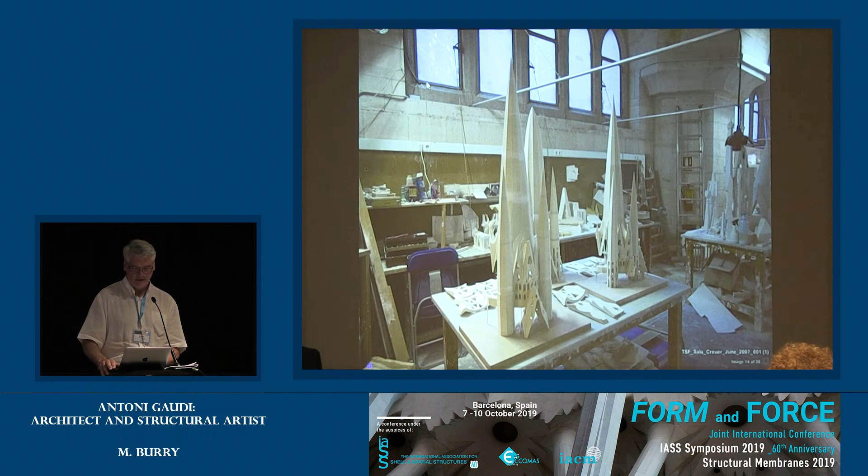And so the project emerged. But what we couldn't do was produce any faithful renders of what the space might look like inside.

You can see the renderer, Australia's top, is able to do exquisite rendering for everything that's known, like the metal and the glass. But calculating the light levels in there, in the end, it had to be done through trusting one's own instincts.

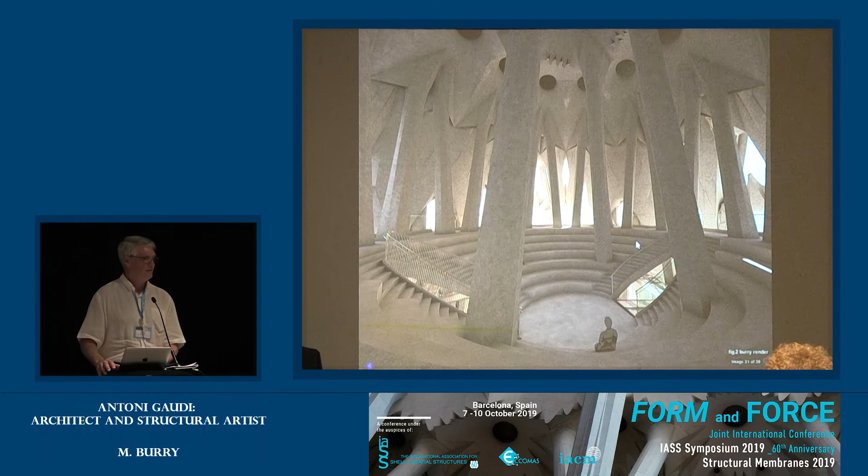Then the fabrication—this coincided with the time when all fabrication for the building was made off-site. So no stonework has been laid at the Sagrada Familia for about 15 years now. It's all been done off-site.

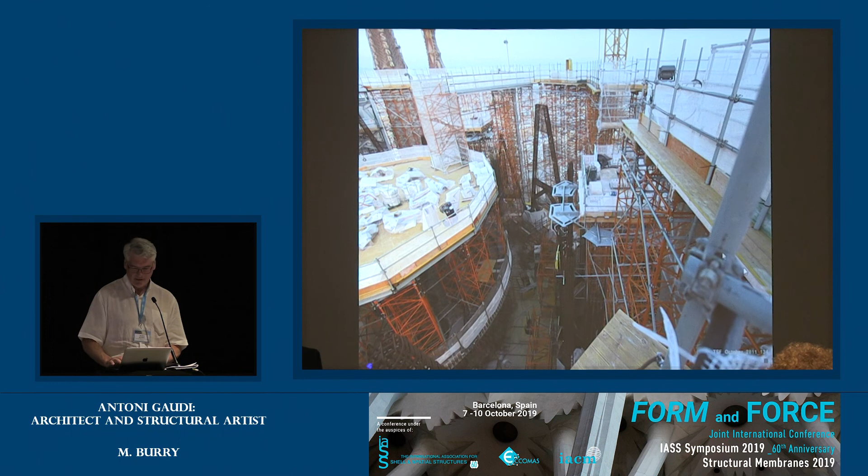You can see the emergence of it, a mixture of precast and in situ. I'm over time now, and just with the crescendo—you can see it emerging.

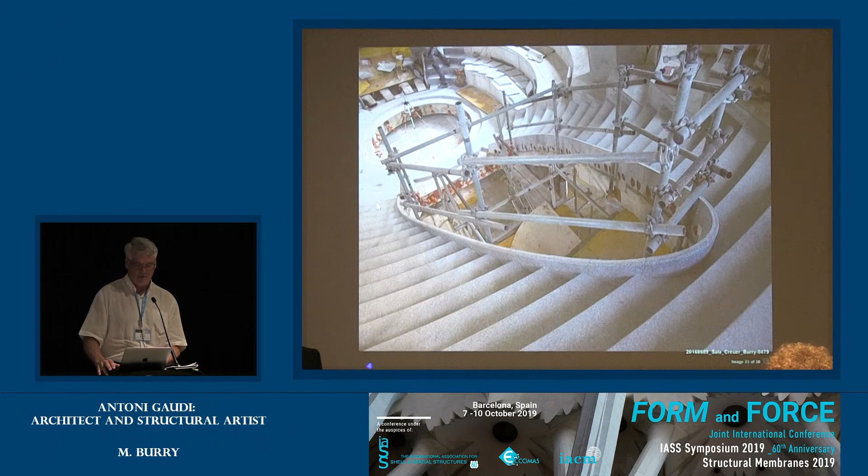At the moment it's not any further ahead than it is in these shots, which are two years ago. But you can see plenty of light—big relief when the scaffolding came down, because it took about eight years to build, and the question was, would it be light enough? It's plenty light enough.

And I know it's lunchtime, but I just want to show you one last set of slides to show you it's not all about technology.

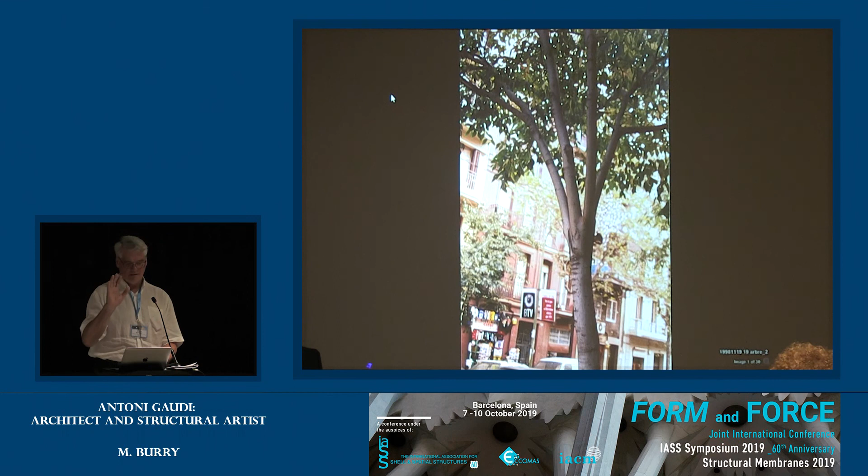So just to summarise it all: the power of the idea, Gaudi, branching in the Sagrada Familia. This branch here, same technique.

I'd love to give you two minutes to think about how you generate that particular column, but I'll save you the problem by just saying it's a rectangle—a counter-rotating rectangle.

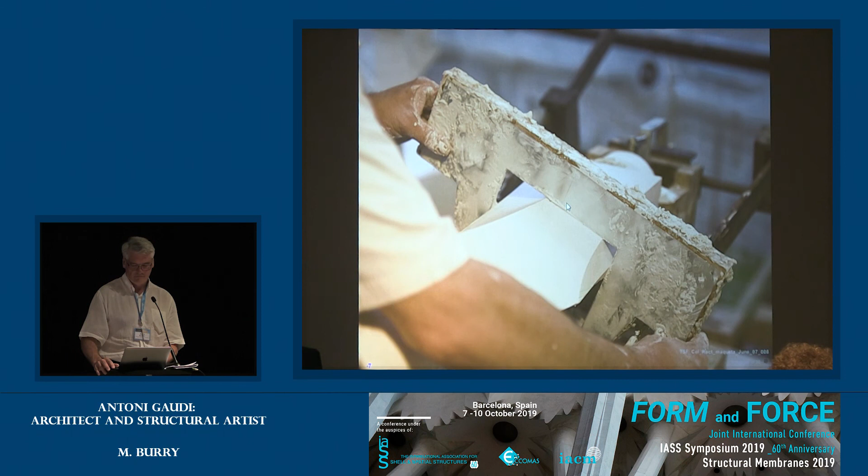And who would have thought that that shape would emerge from such a simple technique? And it's analog.

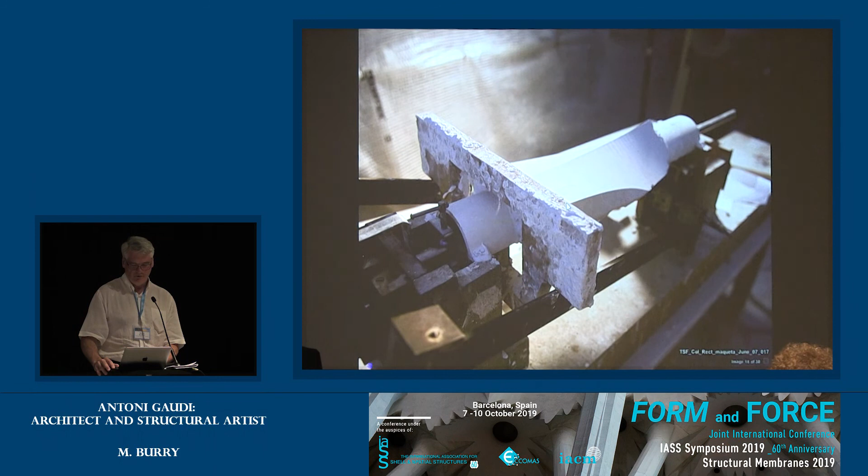We run a branching workshop. They work in analog making the columns, and they work digitally to do the branching.

And it's coinciding with great inventions in 3D printing of concrete, so that we will be able to start working as expressively as this. So that's the legacy of Gaudi, that's the legacy of the Sagrada Familia for Barcelona, and thank you for your time.